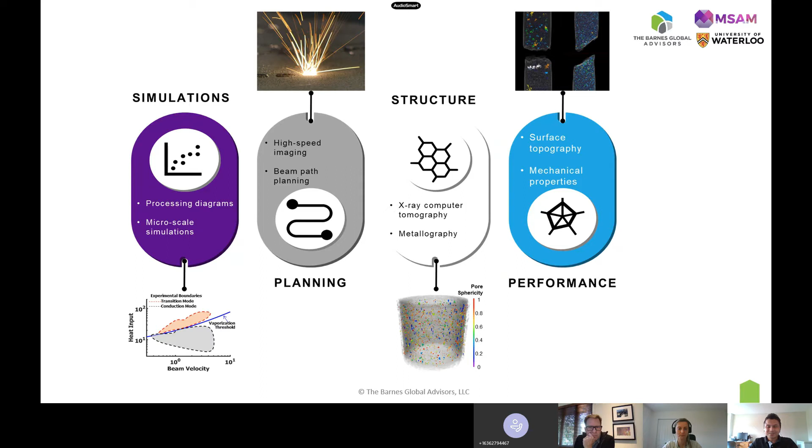We did not use high-speed imaging for this, but we used X-ray XCT scans, and metallography is what we are doing now, although we didn't use it for the competition. And for the competition, I think we just used surface topography again through CT scan data sets to try to understand that. And sorry, I had summarized this for another purpose again, but this is all the alloys that we worked with.

And in my own PhD, I've worked with AlSi10Mg in quite detail, and Ti64, which was initially supposed to be part of my PhD, but aluminum was just interesting to work with. And now we are working with a new near alpha Ti6242 alloy, which has its unique issues. So there's some cracking in another sense, like it's cracking perpendicular to the build direction, which we are trying to figure out now on that material.

So that's unique because it's generally along the build direction if it's due to the delta T. Like for 7 series alloys, I'd expect it to be along the build direction. But this is unique, what we are working on. And I now should mention, Sagar is trying to figure out why some of our parts did not crack, which is the puzzling piece that we're trying to figure out.

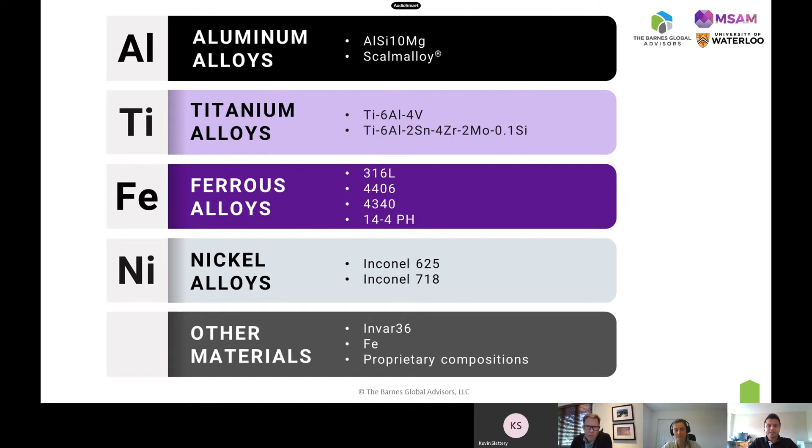Because we did have certain regions in the processing diagrams, especially in the conduction mode areas, which did not crack. And we have certain hypotheses, like maybe there was alloying element losses. That's a reason, because it doesn't seem like residual stresses, because we didn't have cracks close to the build plate. It was about 20 millimeters after building where we got cracks. We're trying to understand that.

But for Scalmalloy, what we initially had done is we had a process parameter set called sample code A, which was pretty good for aluminum, and we had expected it to give us certain issues with Scalmalloy because of the different thermal conductivity as well as density and specific heat. Those are the values that we got from the APWorks data sheets.

So when we use the parameters directly from AlSi10Mg to Scalmalloy, we obtain quite a few lack of fusion pores. I've colored the irregular pores as aspect ratios below 0.7. That's commonly used in a few papers that I read. So we got quite a few lack of fusion pores in this sample, which led to a reduction in density of about 0.1%.

And then in this particular set of processing parameters, we were again working with a defocused beam, and the main goal was to avoid this surface vaporization threshold. I must mention that as part of the paper that I've cited here that we developed, the two things we try to consider in that paper is not only that we need to figure out this vaporization threshold, but also that for different alloys it does work differently, in the sense that for aluminum alloys, we classify that material as a completely different set of alloys, as high reflectivity and high thermal

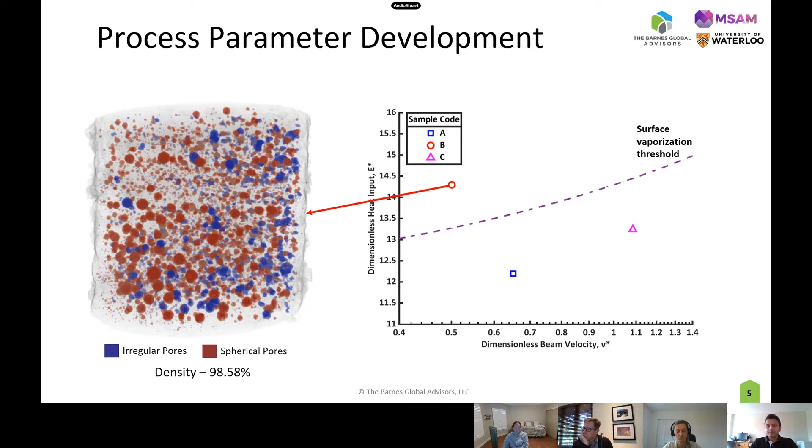as titanium, wherein slightly deeper melt pools are still stable in the other alloys. But for aluminum, it is not impossible that you can obtain good processing parameter sets even in these regions, but that would require more complex simulations understanding everything that happens in the keyhole mode, including laser ray tracing in the algorithm to account for those defect predictions. But then what I went with for sample C, which was our best parameter set, I actually ended up defocusing the beam even more.

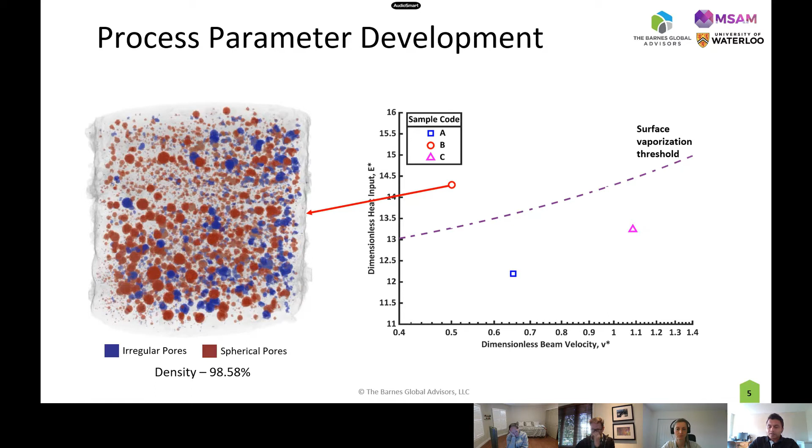The reason I had to do that is the sample B was already at 400 watts, so it was at the physical limitation of the machine. And so there was no way that I could really go further while obtaining the melt pool depth to avoid lack of fusion. So then I went with sample C, wherein I defocused it to a beam spot diameter of close to 180 microns. So it was about 80 microns more than sample A and sample B, which were at about 100 microns.

But the temperature prediction model from the same paper was predicting us to actually obtain higher melt pool depths with this processing parameter. And the melt pool depth predicted was close to 2 times the powder layer thickness. So we wanted to stick with that because that's a general recommendation in literature that you end up avoiding most lack of fusion pores with these melt pool depths.

And in this sample, as we see, we have much fewer pores than either of the samples. And even the pores that we have are concentrated towards the edges of the samples. And that's for another reason, because we had to do a trade-off of whether we want a good surface roughness or no surface pores. So we went with the trade-off of having very good surface roughnesses. And the reason I will explain in a bit.

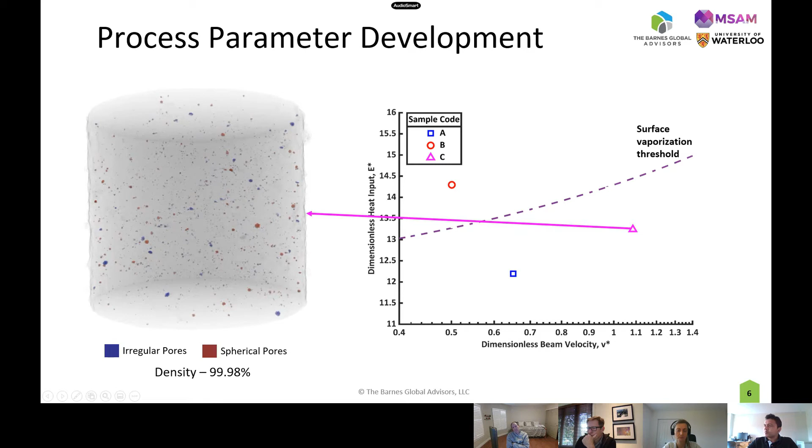But I think we did get all of the features printed. But this is a very small sample, right? It has a width of about 14 millimeters and a length of about 11 millimeters. So at that scale, I think we can definitely further improve our side skin surfaces and down skin. So that's what we have to work on.

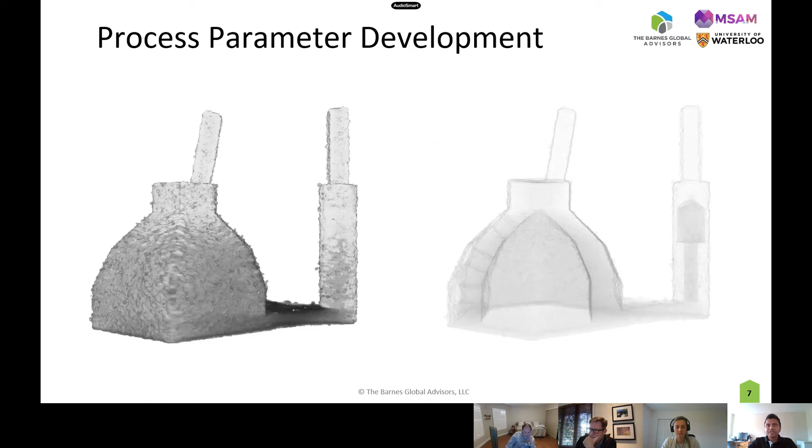And that is part of the remainder of my PhD, still trying to figure out how to predict why certain parameter sets give roughnesses which are much better than others, because that's not been researched much in literature. Studying side skin surface roughnesses, we came across almost no paper trying to predict it, at least until now. And here I also tried to similarly threshold the pores.

But here we see, of course, a lot of pores. That's because these were the pores in between the powder particles. At the top, of course, there was no powder in this region, because some of it settled down because of gravity later, so we had some gaps. And all of these pores are in between the powder particles, actually. That's how I thresholded them. I could look into, sorry, yeah.

What's the resolvable pore that you can get to with this scan? Oh, yes. So with this scan, since we scanned it in a single scan, we had a voxel size of 15 microns. Which means, as long as a pore had an edge length of 45 microns as minimum dimension, we could resolve it. So pores below 45 microns were not resolvable by this scan. Okay. So these are all at least about 45 microns edge length.

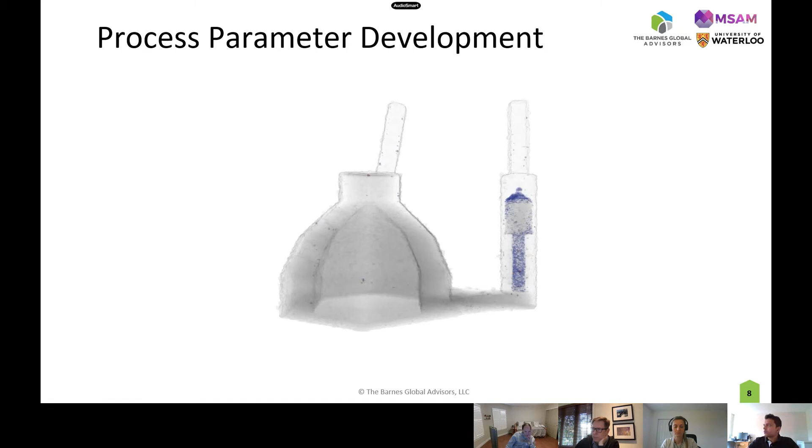And I have a few slides on the side skin surface roughness, a few of which I think we had discussed before. So since we didn't have any literature to look into, we had gone into designing experiments for Ti64 using some conduction mode melt pools, as well as some melt pools which are pretty deep into transition mode or keyhole mode.

And we observed a trend consistently with replicates wherein we had surfaces with much lesser effects of adhered powder particles. So we were taking advantage of the powder denudation. So although excessive vaporization is not good for melt pool stability, it ends up being pretty good for denuding powder next to the melt pools. So since your side skin is a single scan, if we have just the scan on the side skin surfaces to be in the transition mode, we can achieve much better surface finishes.

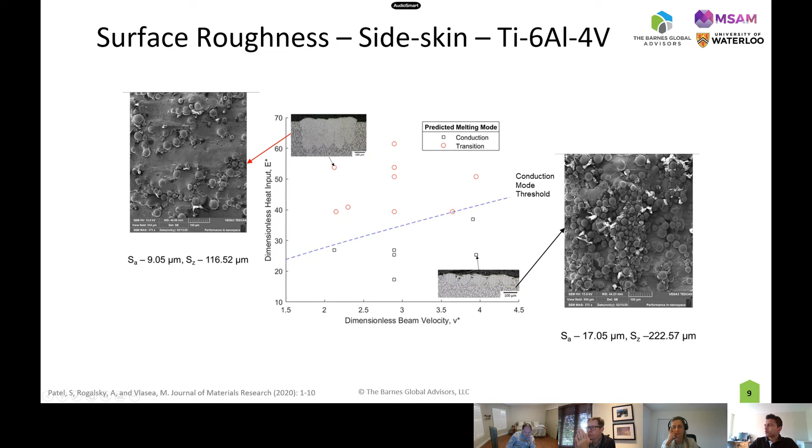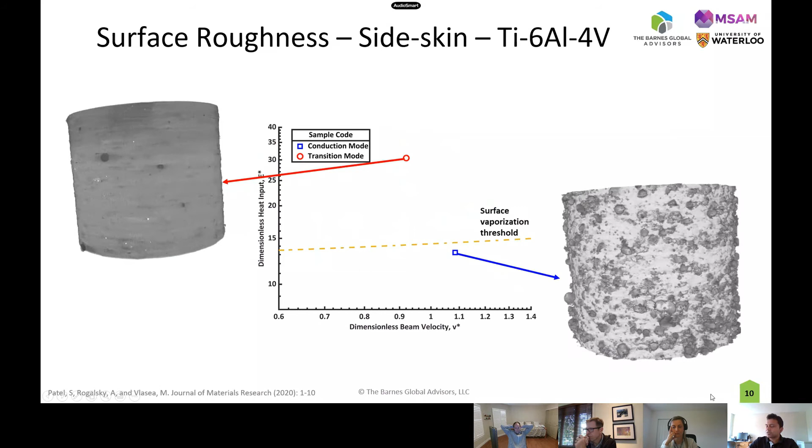And I think this is what we had seen once before in our presentations, when we translated these findings. Okay, yeah, my slide title is incorrect. This is Scalmalloy. So these were our side skin surface finishes from Scalmalloy. And compared to when we use a conduction mode melt pool on the side skin surfaces, we do observe differences in there. And we were able to get some better surface roughness images and data sets out of those samples.

So we printed cubes. What we did in those cubes is we had the core of the cube to be the processing parameters that were our ideal that we submitted to the competition. And then for one of the cubes, I used the same defocused beam conduction mode processing parameters on the side skin surfaces, and these are the four sides of the cube. We took one image from each end.

And these surface roughnesses are much worse than Ti64 as well, which to an extent is due to aluminum alloys always giving us worse surface roughnesses compared to titanium alloys. And this is again of interest to me, to understand why with titanium, no matter what processing parameter sets I use, the side skin surface finishes never really go above 25 microns in Sa, but here I can go as high as 45 microns.

But then when I use transition mode, I am able to go as low as 15 microns in certain surfaces. And in one edge of the cube, we had slightly more, up to 30 microns. But in most cases, the effects of adhered powder particles are minimal. And I think these blobs that we see are more due to liquid metal spatter than adhered powder particles. This was the first shot. We took only one shot at this material, and this is what we submitted for the competition.

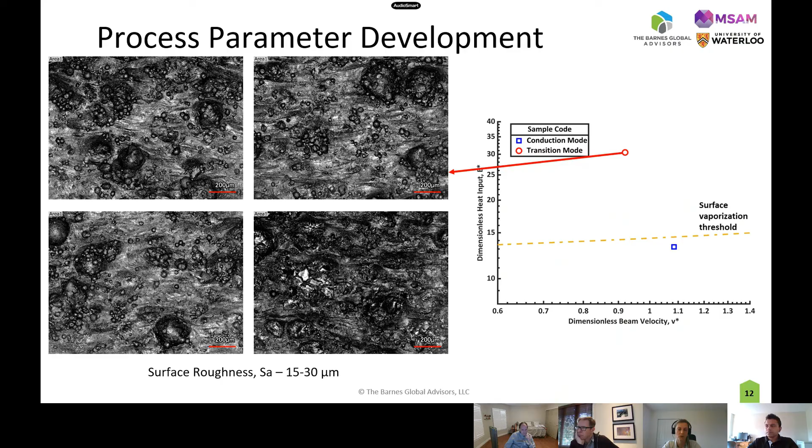So the first question that was posed to Sagar as part of his research program was how do we leverage low-cost models to predict process windows for a diverse range of materials without having to run costly simulations as well as costly experimental runs. For optimization of process parameters in the core, the modeling theory that was developed was stress tested against a lot of different materials. And now the challenge is how do we obtain proper surface quality as well?

And how do we construct models that can predict process windows for good surface quality, which now adds complexity in terms of the spatial orientation of your surface. Sagar has only studied in depth the side skin, which is the vertical surface, and the top surface. But how do you extrapolate your modeling theory to encompass more complex surfaces as well? So that's where we are with that study.

I don't know where the tensile work or the tensile samples are. The tensile samples, yeah. Just today I got an update from the machine shop that they began machining. I'm going to read out what the machinist told me. Carl was able to successfully machine the gauge length and even the curves, but he had to take out about 200 microns on the surfaces to keep the curvature. For the grip sections, he's going to sand it off or polish it himself. I think he's able to do that.